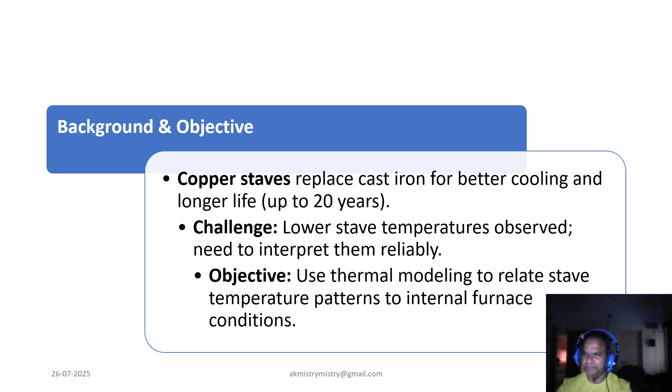Hence, let's explore the evolution of stave linings. In the past, cast iron staves were the norm, robust but limited in heat extraction. Modern blast furnaces use copper staves, offering very high thermal conductivity, enhanced cooling power, formation of a protective accretion layer, and longer operation life up to 20 years and more. This upgrade changes how we interpret thermal behavior.

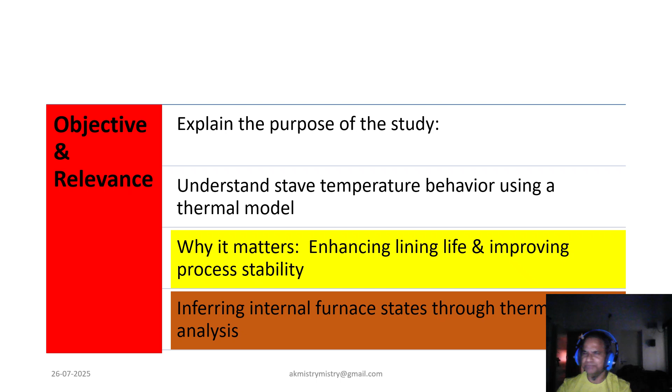Now, stave temperatures are more than just readings. They are the furnace's vital signs. These temperatures are influenced by many phenomena, and a few highlights are: accretion formation on the stave surface, gas flow distribution inside the shaft, and material descent along the wall. If we read these patterns correctly, we can detect instability, wear zones, and process disturbances very early, well before damage occurs. The most important part is to read these trends correctly.

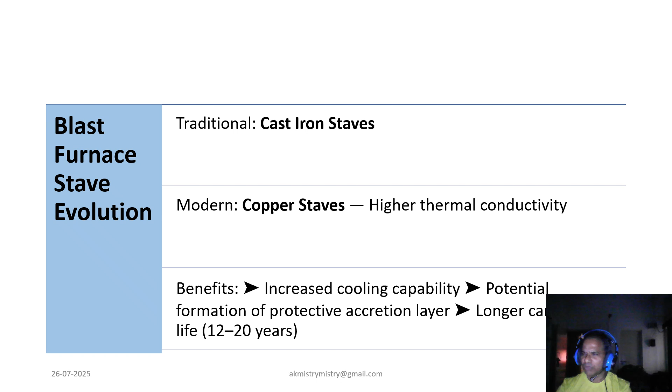Now, coming to the four typical thermal states that we observe at the stave hot face: normal, or stable operation with uniform gas and material flow; accreted, a frozen layer of slag or ore on the stave face, acting as a thermal insulator; attenuated, poor gas flow due to fines buildup or restricted permeability near the wall; and channeling, hot gases bypass the packed burden, leading to localized overheating.

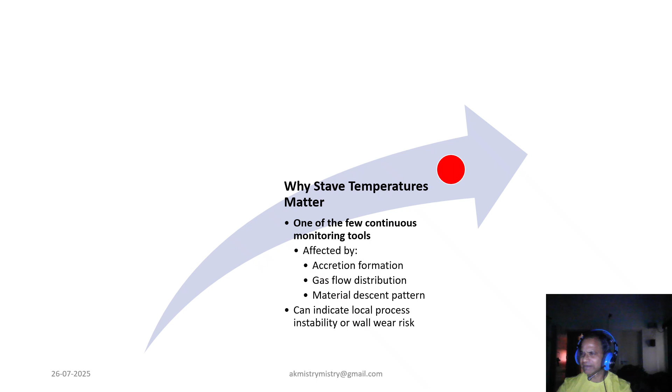Each condition leaves a thermal signature and tells us something about what's happening inside, and that's why it is most important to read each trend with the right logic and science. So as we can see, thermocouples embedded in the staves offer rich diagnostic insight. Here is how their readings align with the different conditions.

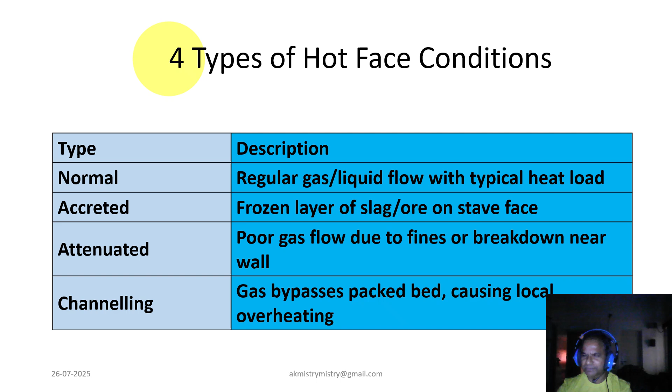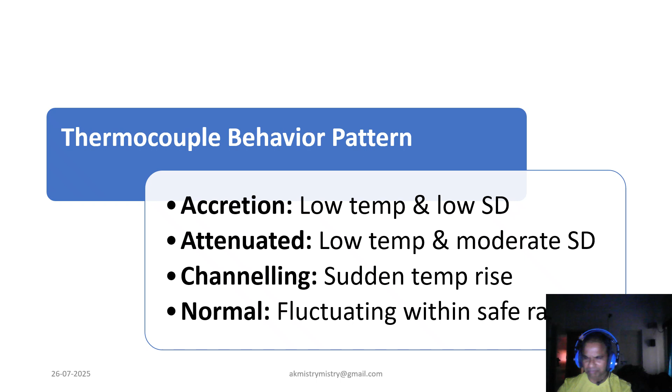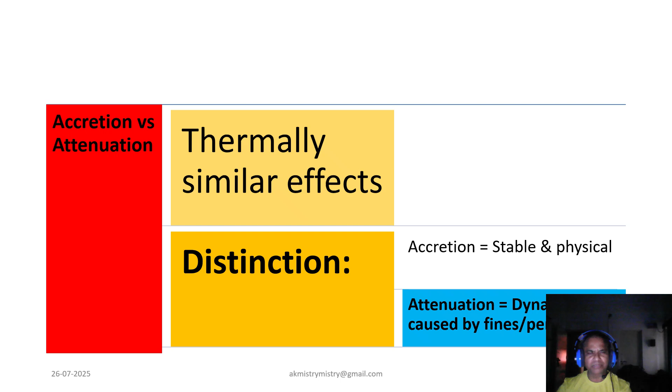Now coming to the thermocouple behavior we just discussed, here is the most important part which confuses most of the time. This is about accretion and attenuation. Now let's compare two deceptively similar states. Accretion is basically a physical layer formed on the stave: protective, stable, desirable. Whereas attenuation is caused by fine particles disrupting gas flow: not physical, less stable. Both result in low temperature, but misinterpreting attenuation as accretion could lead to delayed response or false assurance. That's why it's very important to differentiate both in order to take corrective measures.

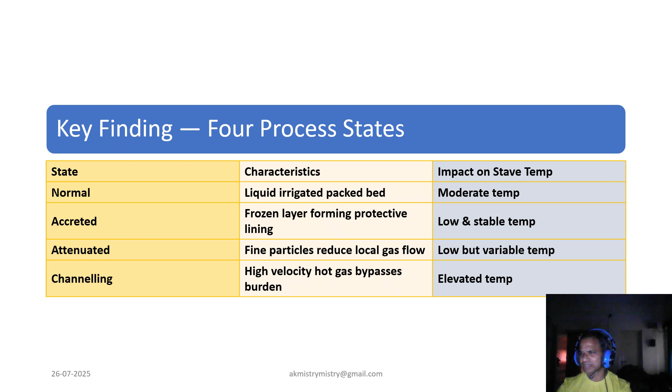Now coming to the four process states, our model highlights four distinct states as we have studied in the last three slides: normal, accreted, attenuated and channeling, and each trend needs to be read correctly by the operator. Each condition reflects a different combination of heat load, gas flow and material descent near the stave. This classification helps us decode thermocouple patterns into real-time process insights, turning thermal data into operational intelligence.

So a modeling approach has also been applied in this direction of analysis. To analyze these conditions, we use finite element analysis to develop a 3D steady state thermal model. Inputs include thermocouple readings and thermal properties of the stave material. These simulations allow us to map observed temperatures to actual furnace scenarios, making interpretation more reliable and more predictive.

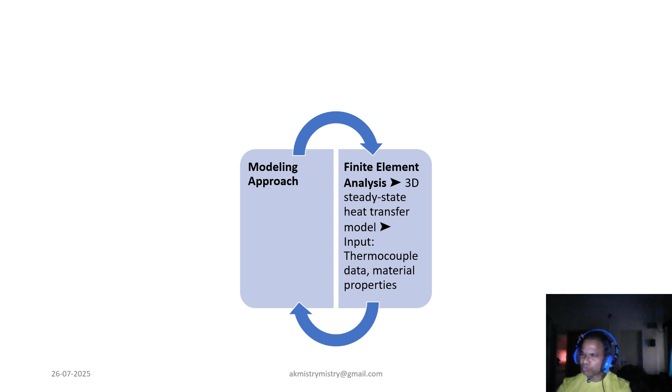Now, accreted staves show low and very stable readings, while attenuated zones also show low readings but slightly fluctuate due to shifting fines. Channeling zones show rapid spikes, as we have already discussed, and these channeling zones are high temperature danger zones. Surprisingly, attenuation dominates more than 90% of the time. It is a silent disruptor we must manage carefully.

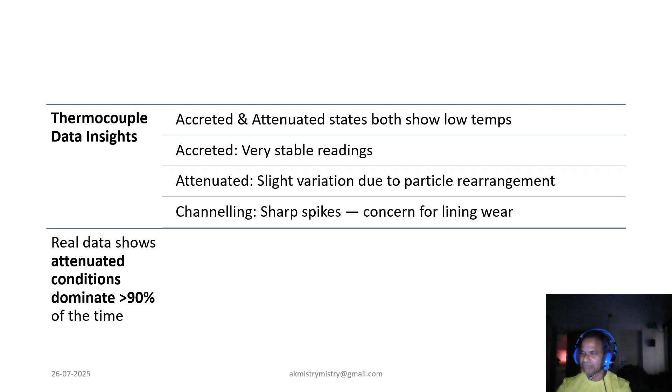And thus, the impact of attenuation goes beyond temperature readings, and it is all about prevention and cure. It can prevent accretion layer formation, delay reduction reactions near the wall, and lead to cold descent of unreduced burden. So we must monitor and adjust wall burden composition to minimize the effect and maintain the campaign.

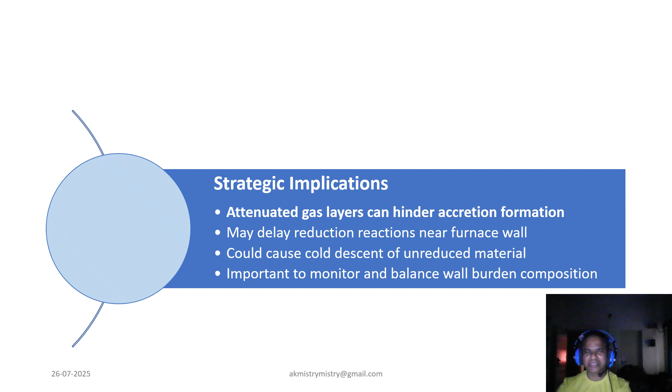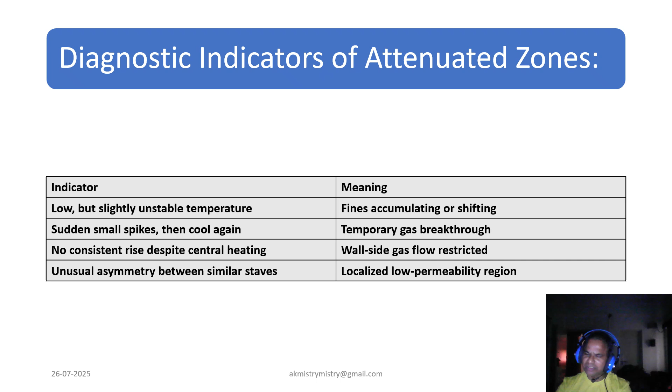Hence, to detect attenuation early, look for subtle indicators like slightly unstable low temperature readings, minor spikes followed by quick cooling, gas breakthrough events, wall side temperature lag despite central heat increase, and unusual temperature asymmetry between adjacent staves. This is also one of the very important clues. Correlating all these clues to allow timely correction before damage occurs is the right approach to operate the furnace properly.

So, in closing, copper staves have transformed blast furnace cooling, but interpreting low temperature is not always straightforward. Attenuation and accretion both show low readings, yet only one offers protection. Through thermal modeling and careful thermocouple analysis, we gain insight into near wall conditions and unlock proactive control strategies.

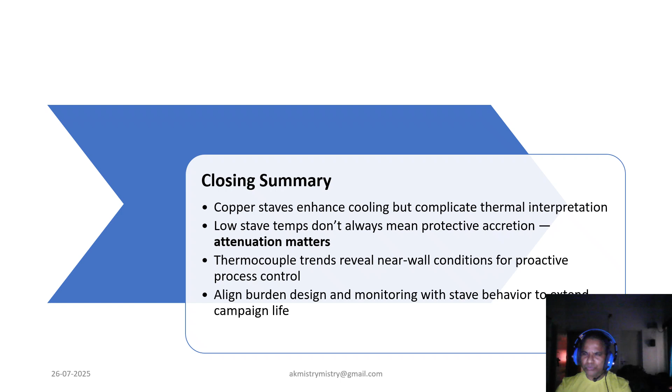So the final takeaway: remember, stave temperature is the language of the furnace. This study helps us translate that language into actionable strategies. Aligning monitoring, modeling, and burden design with stave behavior will undoubtedly drive longer campaigns. It will also bring safer operation and